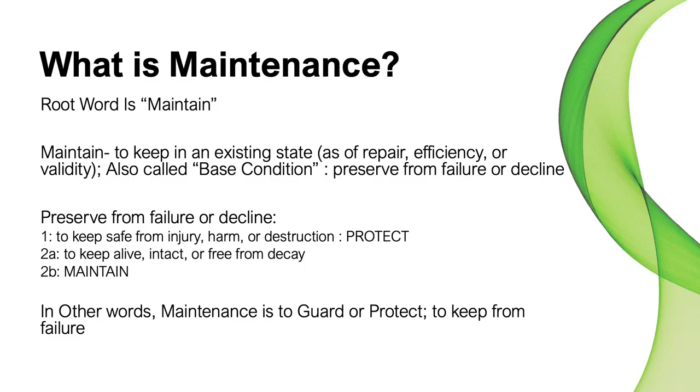What maintenance is not is firefighting. That's not the act of maintenance, that's the act of correction.

You're gonna love tomorrow's keynote, by the way.

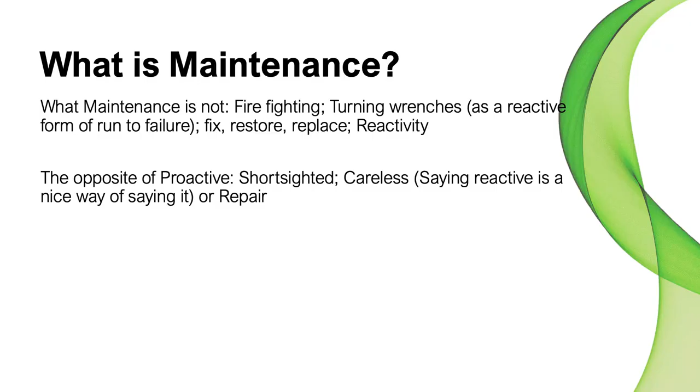From a terminology perspective, we've got all kinds of fun stuff we're gonna talk about today. This is the exciting stuff about maintenance. We're gonna talk about potential failures and failure modes and functions and failure modes and effects, and all kinds of boring crap that gets us down to what do we do to an asset.

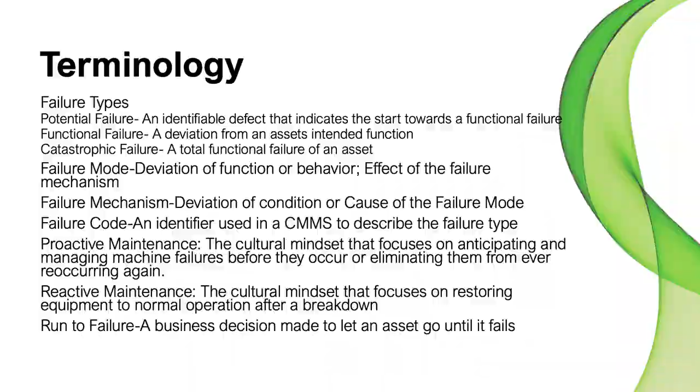Typically what happens is engineering drops assets off in your plant. Hopefully they even give you a manual with it. That's a maybe. And then someone transcribes the owner's manual into EAM, and that becomes the strategy for the asset. This is a common scenario. Unfortunately, it's a horrible way to derive a maintenance strategy.

How many folks, did anybody drive here today? Is anybody driving? We have a couple people that drove. Okay, did you walk around your vehicle this morning? Did you check the left blinker? Nope. The right blinker? Did you check all the fluid levels? Well, the owner's manual tells you to do that each and every time before you drive the vehicle, so why didn't you do it?

I didn't read it. Well, it's impractical to do it every time you get in. Well, it either is the right strategy for the asset or it's not, right? And in your head, you did what's called a risk prioritization. You have determined it is unnecessary for me to check the left blinker because you have what's called detectability.

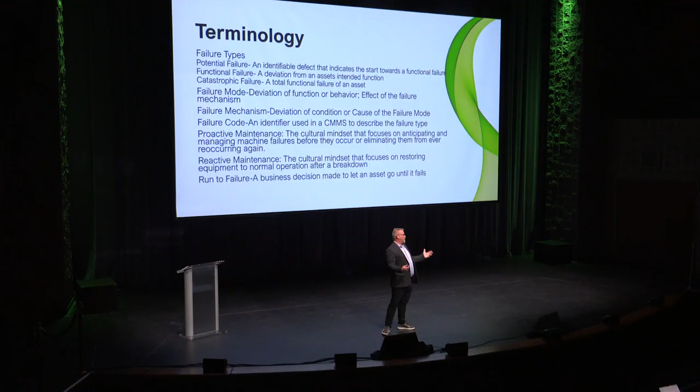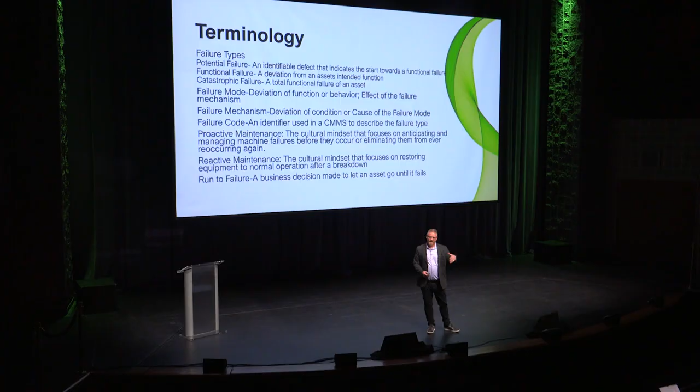Inside the cabin, if the left blinker is out, it will blink faster. So as an operator, you have detectability. You didn't check the tire pressure because now you have a dummy light inside the cabin that tells you your tire pressure's low. The design of the vehicle, the asset itself, has reduced its risk priority number for certain activities. And in your head, whether you knew it or not, you walked through the logic that exists inside EAM in the RCM section.

So we're going to walk through some of this terminology together and hopefully understand it a little better. I'm not going to read. You guys can, everybody can read? Great. I am far from a read-the-slides person, which is sometimes a downfall.

Well, let's look a little bit about some of this failure mode and failure types. 3 types of failures to be familiar with. The potential failure. A potential failure means a component on the asset is going to fail, but it has not catastrophically done so yet.

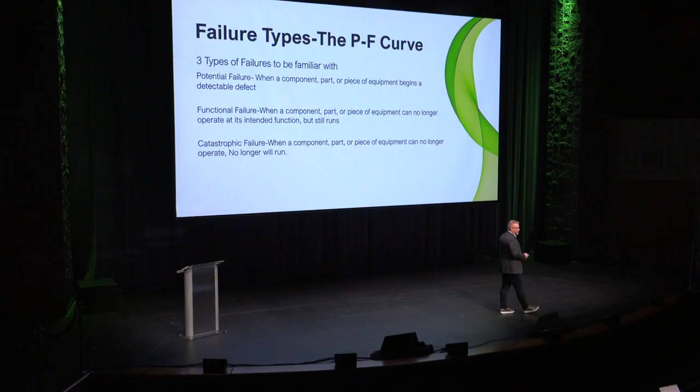If I get some water inside my bearings, because I'm in a food manufacturing plant and we pressure wash the bearings every night, and we aim specifically to get the water into the bearing, we have a potential failure. We then have actual functional failure. This is when the component can no longer perform its intended function.

And this can be catastrophic or not catastrophic. If I have a pump where the impeller wears to a significant enough place that I can no longer pump the specific GPM at the right pressure, then I have a functional failure even though the pump has not died.

You then have a catastrophic event. This is when the bearing blows apart, the shaft gets scored, the pillow block gets a nice oval in it, and we're replacing a bunch of parts.

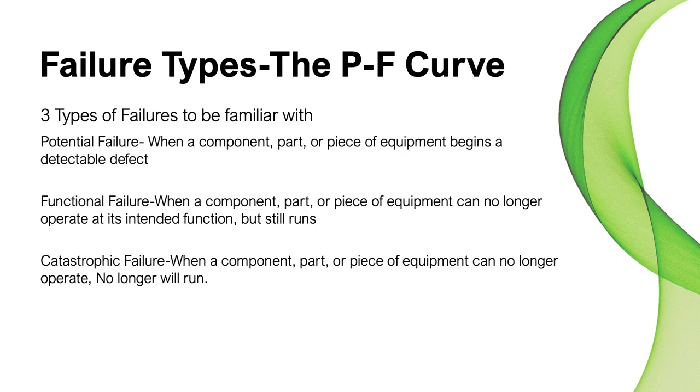The strategy from a maintenance perspective is to avoid the catastrophic event and hopefully avoid what causes the potential failures. Doug Plucknette's PF curve is one of the best ways to see this. This PF interval, or time it takes from the potential failure until the catastrophic event, is what we're trying to manage as a maintenance organization.

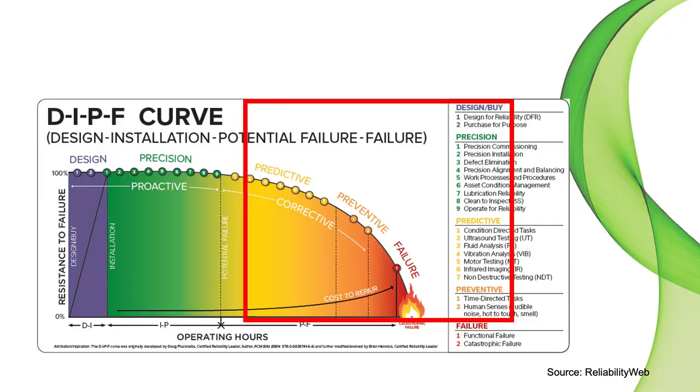Can we stop a bearing from ever failing? No, it will fail. What we can do as a maintenance organization is give it the longest life possible, and know far enough in advance to have a minimal impact to the operation.

Will the impact be zero? No, we're going to have some time that we have to replace the bearing. But we want to have the minimal impact to the operation. When is it most convenient for us to swap it out?

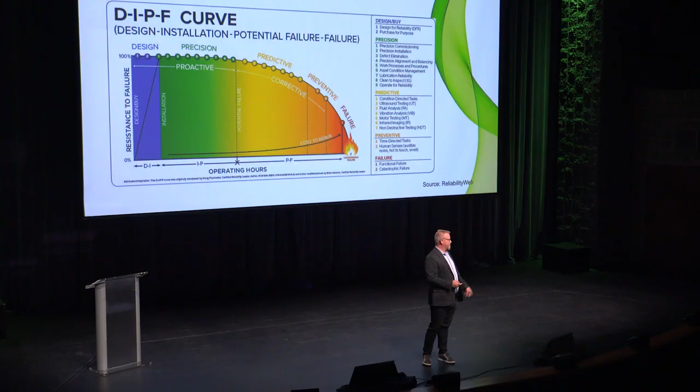So how does equipment fail? Because it's physically unable to do what it's supposed to do, or because in some cases we cause it. Sometimes it's a human intervention that causes a failure.

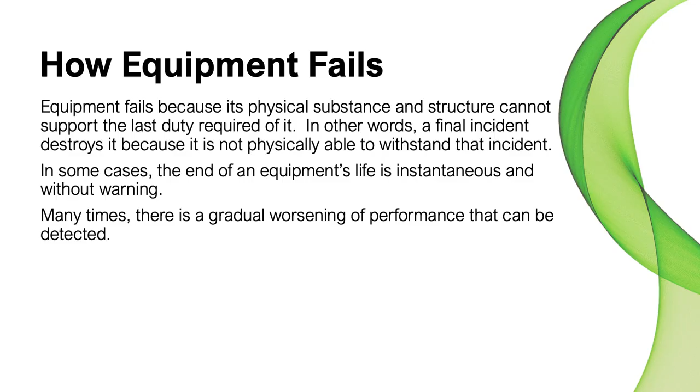And so when we develop a maintenance strategy, we are trying to do the minimal amount of intrusive maintenance. This is why we use things like predictive technologies, ultrasound, vibration analysis, and infrared thermography. Those technologies do not stop a failure from occurring. What they do is buy you time to appropriately plan the work when it is least impactful to the organization.

Oftentimes, this degradation can be trended over time, and we can have a rough idea of that PF interval—how long will it take to become catastrophic, relatively speaking. Knowing that time window allows you to determine frequency of execution of tasks.

So we can derive or guess what the frequency is, whether it is meter-based or time-based, both handled well within EAM. But that interval is based on what's the point from potential failure until a catastrophic event. Obviously, we need to inspect or take task interventions in a shorter frequency than that interval. If it's longer, then we could miss the incident.

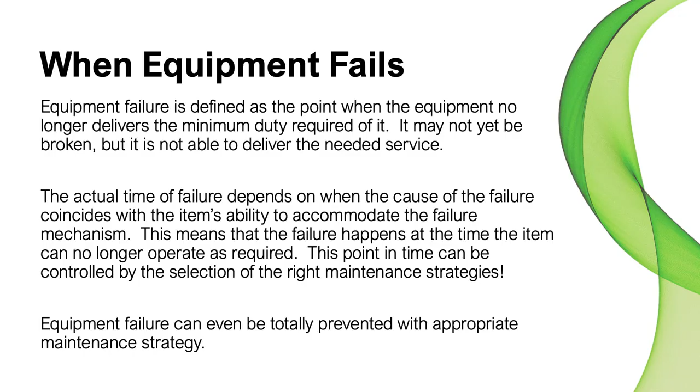So the actual time of failure depends on when the cause and coincidence of the failure happens. This point in time is when we can no longer operate the asset effectively. And our maintenance strategy is designed to prevent that issue. So how do we get to that point? Let's explain it very clearly.

On the left-hand side is infant mortality. This is when a component does not burn in. It doesn't even last its warranty period. This is electronic components that weren't bench tested, things that weren't installed properly, things that were manufactured the day after the Super Bowl, all that stuff.

On the far right, we have age-related wear out. This is stuff that was built right around World War II. Otherwise, this is a unicorn.

Everything in between is known as the random event pattern. The reason it's random is because if I take 2 pumps, identical, install them next to each other and run them the exact number of hours, they will not fail at the same moment for the same failure mode. That makes failure modes, generally speaking, random events.

When an asset is designed, it has a base condition baked into it, a designed-in reliability. I can buy a Toyota Corolla or a Ford F-150. They have a completely different expectation of reliability and cost to operate and maintain, and it is baked into their design. You do not get to choose it later.

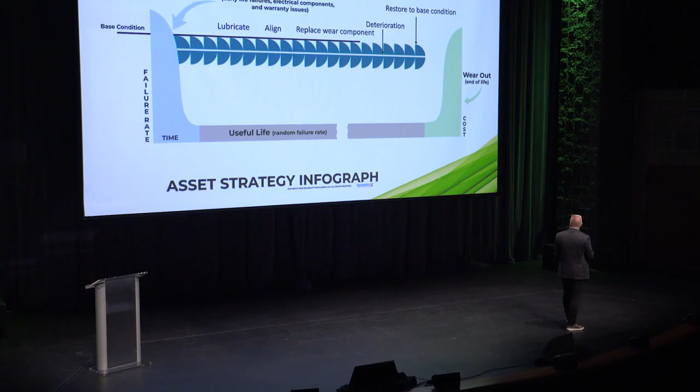Because of this, we derive a maintenance strategy. Let's say we use the OEM recommendations. Every morning we check the lights and restore back to base condition if we find an issue. This happens in your plant every day - this is your maintenance strategy. An asset deteriorates, maintenance shows up, replaces a belt, restores it back to base condition. Asset deteriorates, maintenance shows up and lubricates it, restores it back to base condition.

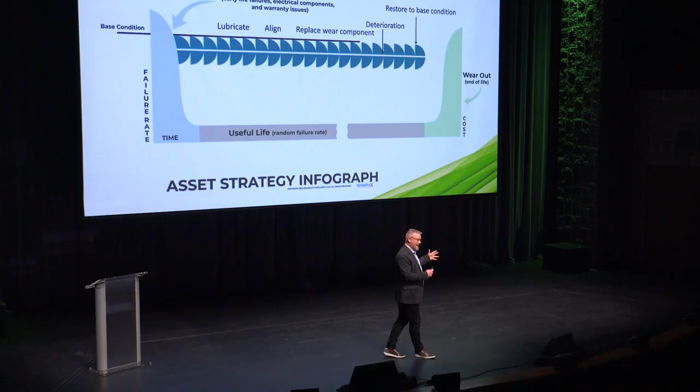This is the role of guard and protect. There are certain components on your assets that are called wear components. They are designed to wear, to protect the asset. Maintenance's role is to manage those wear components.

The inverse of this is the cost of the asset. As an asset deteriorates and friction builds up in a bearing, I have to use more energy to turn the motor. When I restore back to base condition, I also restore back to base operating cost.

Now, we utilize techniques such as design for reliability to change where that base condition sits. For example, we can use motor bases that are two pieces of all thread and it takes forever to get them aligned, or we can buy motor bases with two sets of rails and a single adjusting bolt. They have a different cost to the maintenance organization based on how long it takes to maintain that asset.

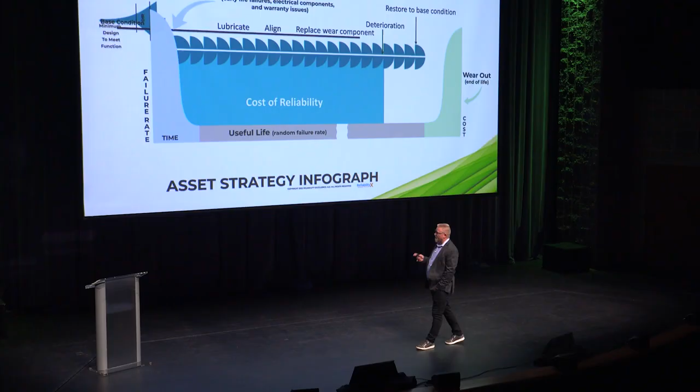We can buy cheap motors or we can buy good company motors, just like we can buy the Toyota Corolla versus the F-150. We utilize techniques like reliability-centered maintenance, or FMEAs, or the functionality inside EAM around RCM, to alter this pattern.

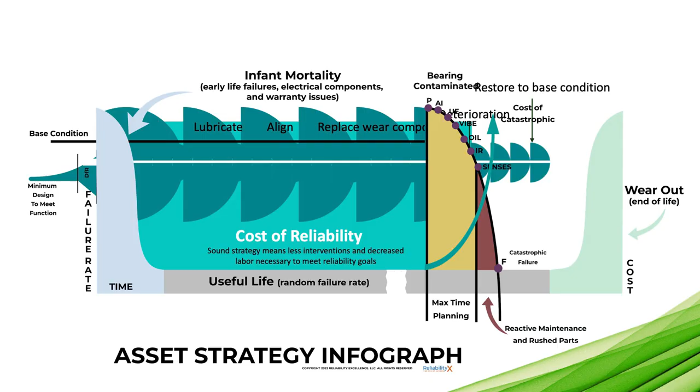How does this happen? Great question. This happens because I'm no longer doing tasks I should not be doing, and my frequencies are based on the actual failure mode. What does that mean? Great question.

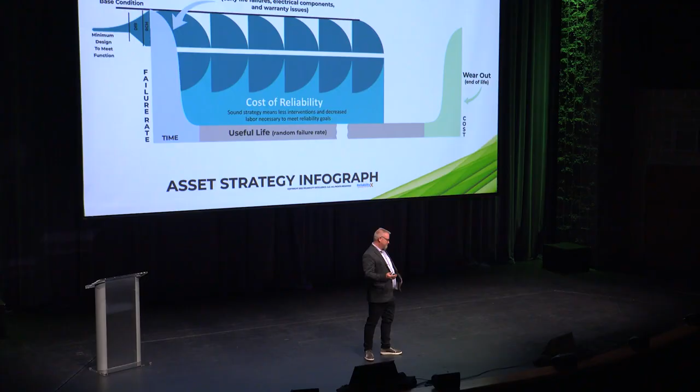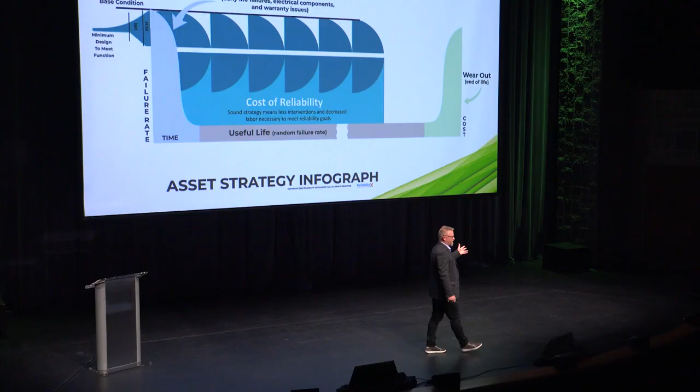Let's say it's an air handler. How many folks have air handlers in your plant, right? It's a simple asset, we'll use simple stuff that everybody has. The PM frequency today is probably driven by the lubrication requirement, so you have a quarterly PM. And somehow, while I'm there, I'm checking damper linkages that fail once every 10 years, and I'm inspecting things that don't fail, that I have no history of a failure of. But because I'm there, I'm doing a bunch of other stuff.

The logic you'll go through when evaluating risk priority number will get rid of things you should not do and give you a more appropriate strategy, thus changing the deterioration rate because there's less human intervention, and changing the overall cost to operate and maintain the asset.

Now, eventually, I'm still going to have this potential failure, this point in failure time, where I contaminate the bearing. I get a speck of dirt, somebody doesn't clean off a grease gun, something. We utilize those predictive technologies to assess for these conditions.

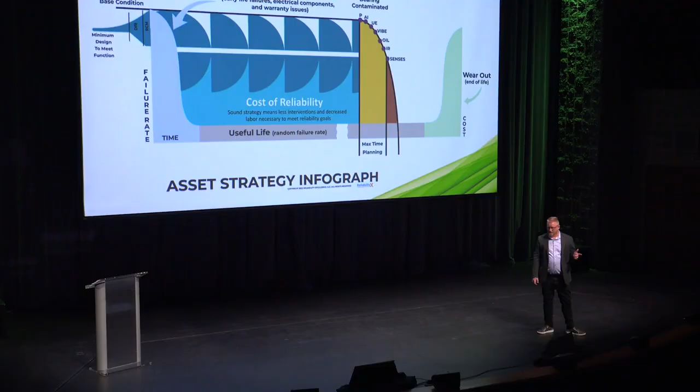Whether it's machine learning, AI, or infrared thermography, vibration, and all those other technologies, we are assessing condition long before your senses can sense it.

The reason we do that is for maximum planning time. Should we use our senses, we're more likely to have the catastrophic event. And when we use our senses, we're often rush ordering parts.

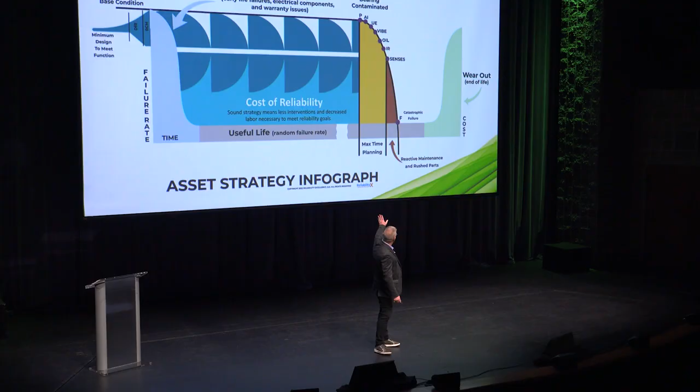So I can utilize what EAM has built in, utilize the predictive technologies, utilize the machine learning capabilities, and know in a large enough window to appropriately plan the activity, or I can let nature take its course.

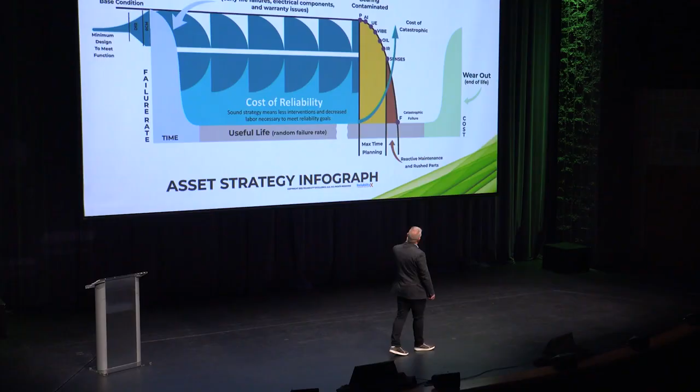It is, but it's also why your costs are high. Because not only am I replacing the bearing, but I scored the shaft and I have to replace the shaft, I have to replace the pillow block, maybe I damaged the fan. So the idea of we can't afford to do that, but we can keep affording to rush order parts and replace five things instead of one is nonsense.

So how does this work? Luckily, there's a standard and I don't have to reinvent the wheel here. SAE JA1011 is the standard for RCM. There's also JA1012, which is the application of it. And basically what it's going to do is ask a series of questions.

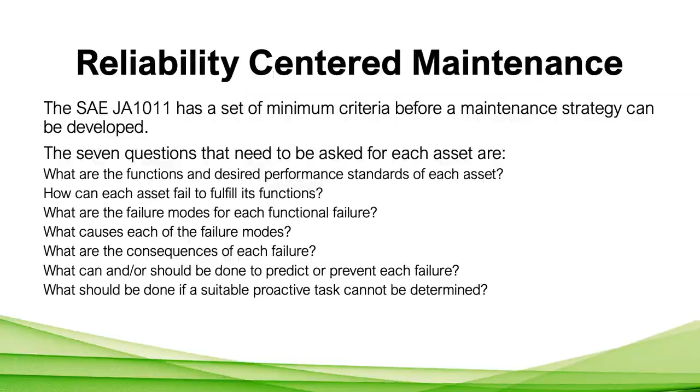What are the functions of an asset? As an example, the functions of a pump are to displace a medium at a specific GPM and pressure. The secondary function of a pump is to not leak unless it has a packing gland, and then it's leak at a specific drip rate. So I've got two major functions.

That is, well, how can an asset fail to perform those functions? I can have a motor failure, I can have impeller wear, I can have all kinds of things. What are the failure modes associated with that?

Causes, consequence to a failure. We'll talk a little bit about some of those. We're not going to get into a lot of detail because I only have an hour. And then what can we do to either predict or eliminate the failure mode from happening? And if we can't do that, what other intervention can we do?

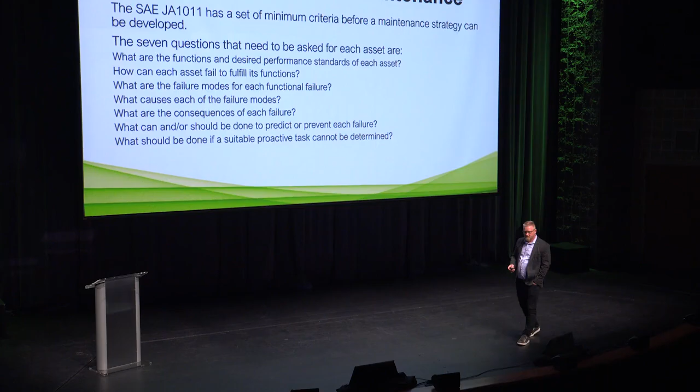So let's look at how it's structured. Whether it's an FMEA or an RCM, it's pretty much the same thing, just to a slightly different detail level. We've got functions, functional failures, failure modes, effects, consequences. And then we derive this risk priority number. We'll talk about that in just a second. And the entire goal is to reduce that risk priority number.

That's all baked into EAM. How many folks are using that functionality inside EAM today? Outstanding.

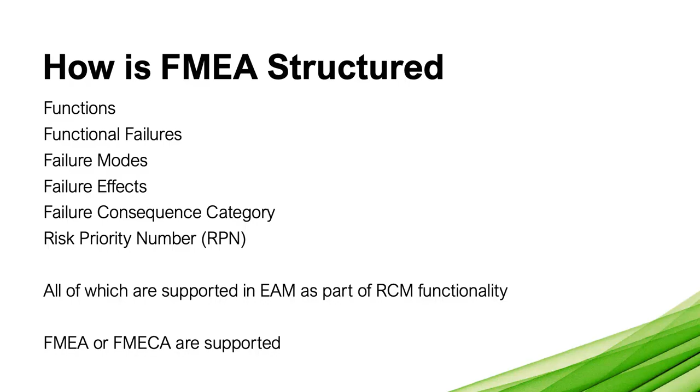This all starts with first understanding what is an asset. This is often where folks struggle. What does or does not go in the system? What constitutes an asset record? That should be well defined inside the organization. Otherwise, we end up with a bunch of stuff you'll never write a work order to.

Or the other way around, finance dictates it, and the only thing you have is everything you spent more than $5,000 on. So we have to define what an asset is.

For me, there's some general questions to ask. I know it's a little bit of an eye chart, but do I replace parts on it, or do I throw it out and replace the whole thing? That's first and foremost. If I throw it out, it's not an asset, it's a spare part.

The second question I ask is, is it a major component located someplace else? So if I have a split air system, I want to know that there's a coil outside somewhere on the roof, just because the location's different.

Next question is, am I required to track its calibration? Calibrated instruments, you don't usually replace parts on those things, but if you're governed by some regulatory agency that requires you to track the calibrations, then they're assets too.

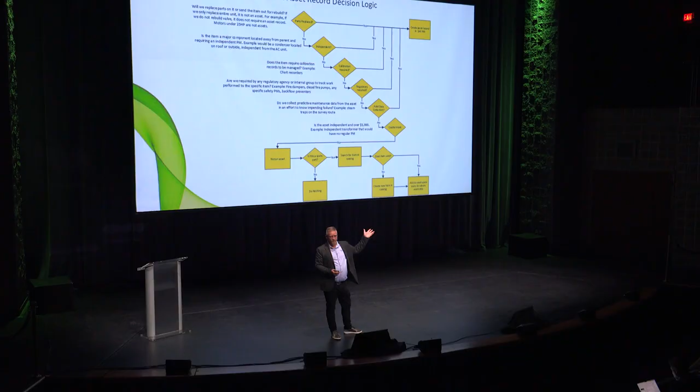And then if all those are no's, guess what? It's a spare part. Now, this is just a general rule of thumb. This is a starting point, right? So you make changes to this based on your organization and what your organization wants to track, but we developed this just to be a starting point.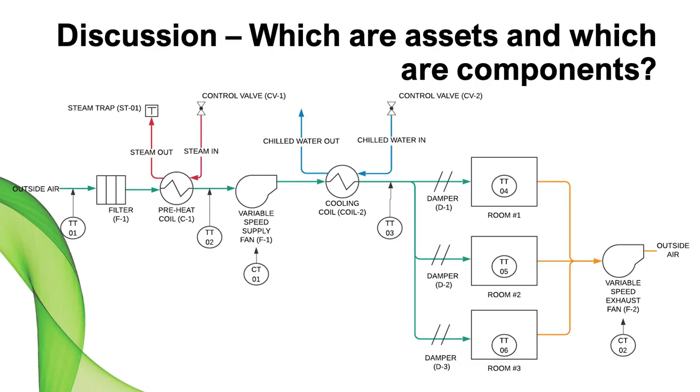In scenarios like this, I would say the VFD, if you replace the boards and it has filters that need to be PM'd, then the VFD is an asset. If this is in a clean suite and you have to calibrate the temperature signals, then that's an asset too. But if not, they're not an asset.

I may replace the coil, but I don't need that to be—that's not an asset. When it's dead, I throw it out and put a new one in. I'm not replacing parts on it. So having a good definition helps us to move along where we need to be.

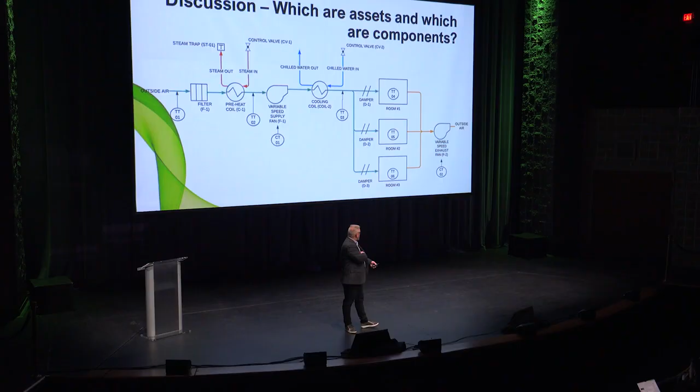So the next step is to understand criticality of the parts, of all those assets we put in. And right, baked into EAM is the ability to not only give a score, but to build the questions that will derive the score. How many folks have their criticality analysis built into EAM as a series of questions? Outstanding.

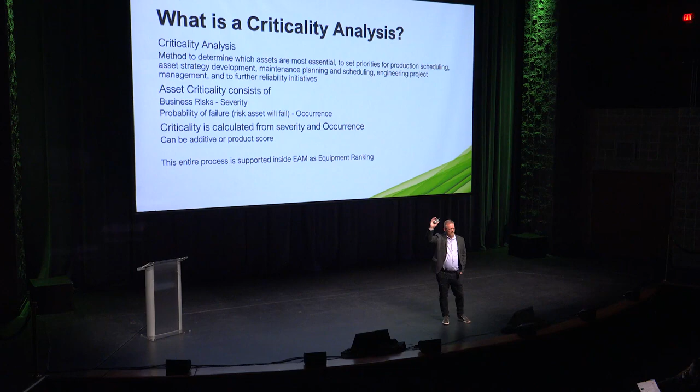We have to understand severity and business risk, and that's different for everybody. So the reason EAM allows you to build it is because that's different for every organization. You can't stand up here on the stage and say, well, it's severe if it costs more than $1 million in a failure. Well, that's great if you're a gigantic company, but things are critical at 10 grand at some companies.

Other severity categorizations that exist: environmental, quality, safety. You can even have other things sitting in there for occurrence. How often is it likely to occur? What's its operating context? Do I need it 24/7, 365? Does it have redundancy? Is it an N+1 scenario? All of those things help derive the critical nature of the asset.

Why do we need to know whether or not the asset is critical when building out a maintenance strategy? Because one of the components to determine should I reduce the risk priority number using some technology or not is the cost to do it. Just because I can do something doesn't mean I should. If it's a non-critical asset, my PM strategy should be run to failure, put some spare parts in the storeroom. It should not be go collect a bunch of predictive data that costs a lot.

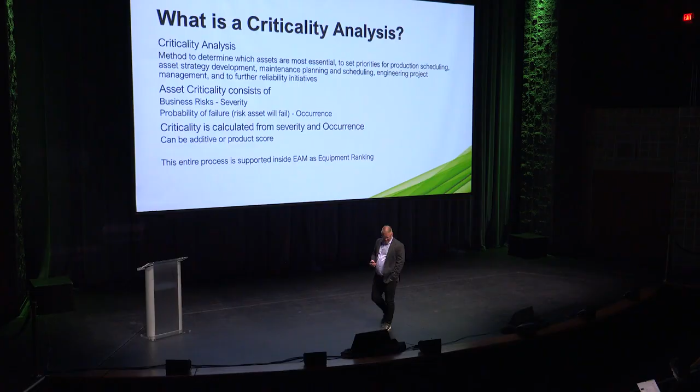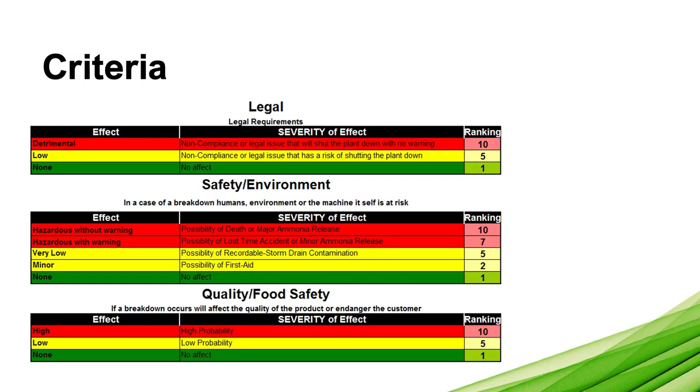And so we calculate risk with severity and occurrence. These are just example criteria that sit in a deck because if you download the deck, you'll have them. We're not going to read through this. Your organization will have to develop their own criteria and scoring mechanism. That matrix can be built directly into EAM, which is fantastic functionality because most systems just say, well, tell me what you did in some Excel file someplace.

Let's go through this really quick. Functions of an asset. If we have an air handler, it is designed to move a specific amount of volume and may have to do so at a certain temperature and a certain humidity level. Lots and lots of functions exist. The first step is to understand all the functions of the asset. Inside EAM, this gets built on the equipment template record when using the RCM logic.

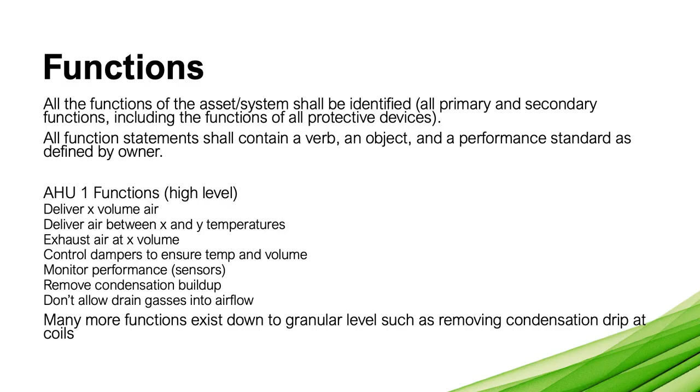We then have functional failures, which basically just means it doesn't do the functions. We then move on to failure modes. How are we going to not move air? Well, we can have lots of reasons we don't move the air. The motor could fail. I could have a belt failure. I can have a closed damper. I could have clogged filters. Many, many reasons why I'm not moving the appropriate amount of air. They're all failure modes.

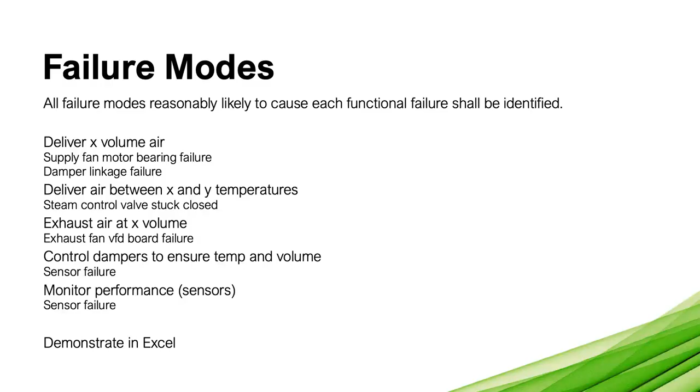The failure effects describe what would happen if no task is done. If I don't do anything, what is the effect of I'm not moving enough air? It could be I have to close down the theater. If I'm not moving air, we're not allowed to use the space. It could be I have product that's stored in here that needs to be at a certain temperature and I lose the product.

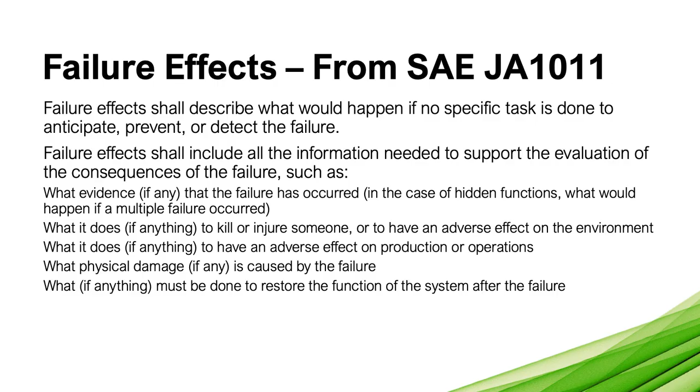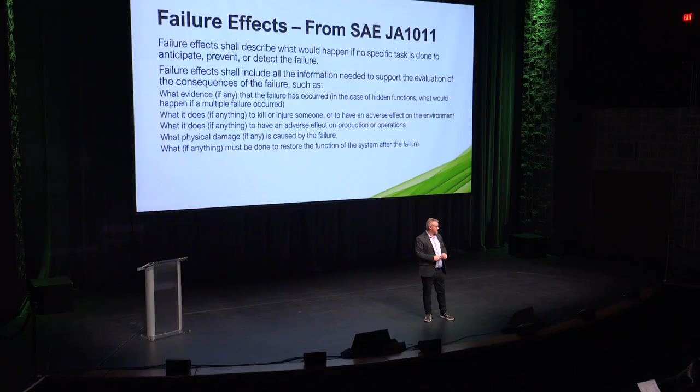Why do we need to know the effects? Well, we're about to put together a maintenance strategy to mitigate this effect. We need to know what its cost is. What would it cost if we have to evacuate the theater? What would it cost if the product in the room went bad? The consequence side of things is more on the safety side. So from a consequence perspective, this deals with safety or environmental. And so we list those out separately.

We then have to get down to a risk priority number. That risk priority number is based on 3 categories. The first being severity. What's the severity of this failure mode? And that varies. It's not asset-based, it's component-based. For example, what's the severity difference between my left blinker is out and my brakes don't work? It's the same asset, it's a car. Completely different severities for different failure modes. If I have a pump, the motor failure has a different severity than impeller wear. If the impeller wears, the VFD ramps up and I can still move product. If the motor fails, I'm not moving anything. Different severities.

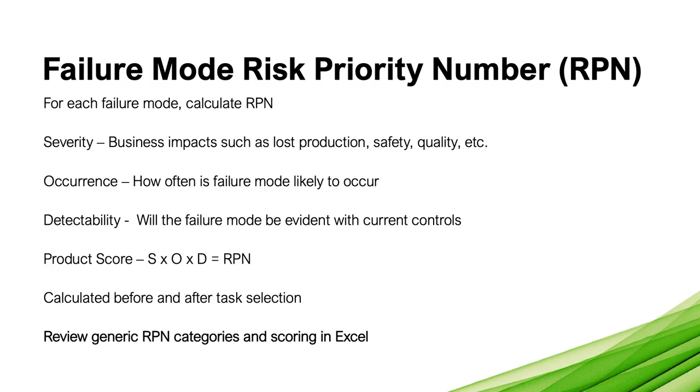The second category is called occurrence. And occurrence looks at how often did this occur? If you have data in the EAM, you use the actual data. If not, you have to take an educated guess. The third entity here is detectability. Will an operator know it immediately? Some failure modes are hidden, and so their detectability is extremely high, meaning, well, it's an inverse score for detectability. A high score means you have no detectability.

Emergency lights, they're all over the place. They're a hidden failure mode. That means you're not testing to see if they work—you're actually testing to see if they have already failed. There's no way to know it will work when you need it. It's not possible.

And so you're testing e-stops, same thing. You're testing to see if they have already failed, not that they work. You may have caused it to fail by running the test, and the next time someone hits it, it's not going to work.

That makes it a hidden failure mode. So detectability is about whether or not the operator is going to know. Now inside my vehicle, I know my tire pressure. The automotive industry has made my detectability score lower and lowered my risk priority number, so now I don't have to check my tire pressures.

This is calculated typically as a product score, and you end up with a risk priority number. The goal of building a maintenance strategy is to reduce the risk priority number. It's that simple—failure modes that have a high risk priority number, you attempt to lower it.

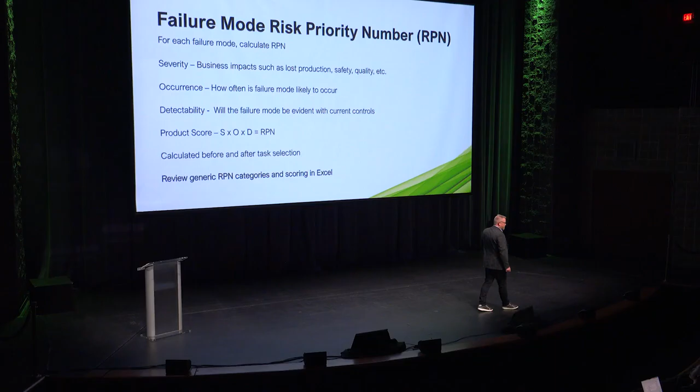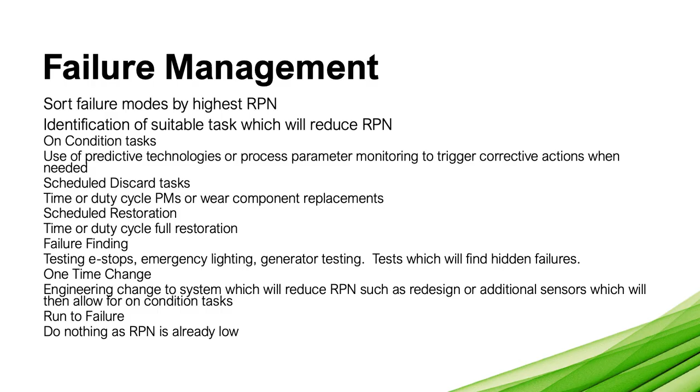So we sort those failure modes by the highest RPN number and decide where the line in the sand is. This is always a point of contention for people that execute this. There's no defined line in the sand—you have to use common sense. When you start getting down to failure modes you know you should not be addressing, that's the line in the sand. Don't do anything below it.

So we've got a couple of different ways to mitigate a failure mode. The first way that we should attempt to eliminate a failure mode is to engineer it out. This is called a one-time change. It's an unscheduled activity, meaning it doesn't happen at some frequency—you're going to do it once. You can engineer out the failure mode so it doesn't happen anymore.

If you are unable to engineer it out, the first scheduled approach is to assess its condition. Assessing condition can happen two ways, through technology or physically. You assess the condition of the asset.

If we can't do that, then we have potentially a scheduled discard. A scheduled discard is appropriate to things that have a consistent failure pattern. My belts usually last 2 years—if that's the case and you know that emphatically, then you can just schedule a PM every 2 years to throw the belts out and put new ones in. If you do not have a consistent failure pattern, then you need an inspection to inspect the belts and an on-condition task to replace them.

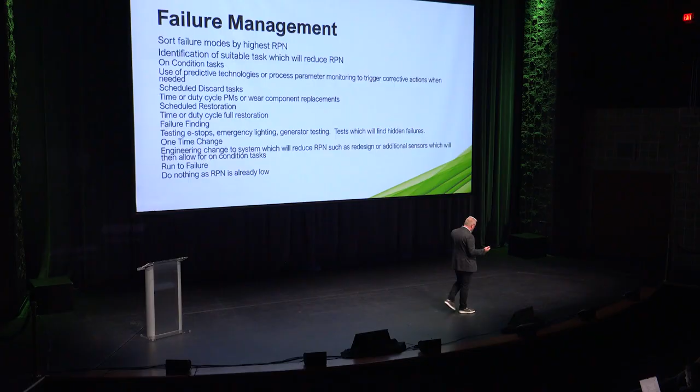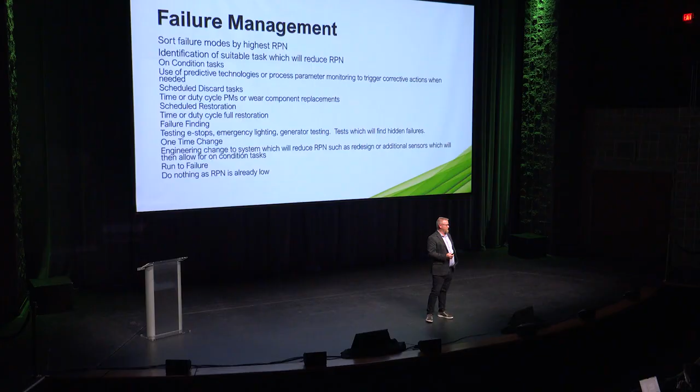Failure finding tasks, again, are check the e-stops, emergency transfer switches, generators—they're all failure finding tasks. A scheduled restoration is if I'm going to strip a piece of equipment down and rebuild it at a certain interval. This is often popular, but not based on it being derived by RCM logic. Companies will do annual shutdowns, ripping all of their equipment down to nothing and rebuilding it, and then they have 3 weeks of ramp up because they can't figure out how to get it back together right.

And then, of course, you have run to failure. Run to failure is an adequate strategy. Sometimes it's not worth doing the maintenance work. That's really contextual—it's based on what the asset is doing and the value proposition of the asset for your organization.

When I lived in Philadelphia, Philadelphia has an awful lot of radiant heat hot water systems for houses. So we've got a little B&G 100 or a little Taco, a little square pump that circulates hot water through the radiators. That thing's critical in the winter. But that same pump in your plant is run to failure. It's the same pump—the critical nature of it is what is it doing for the organization.

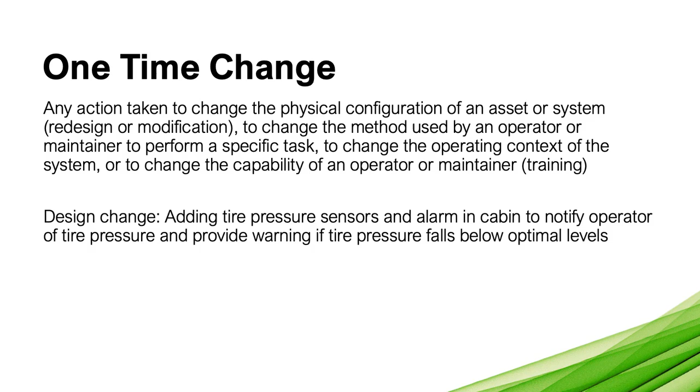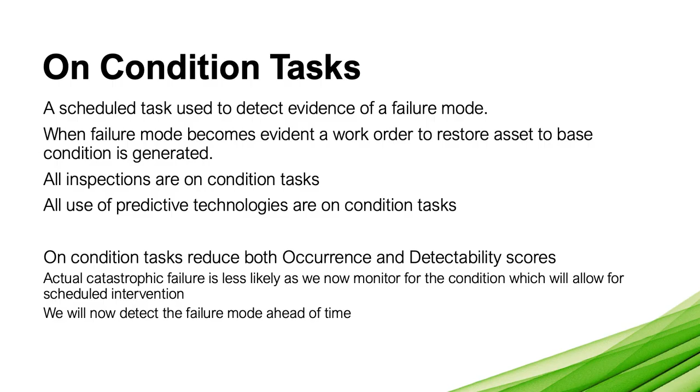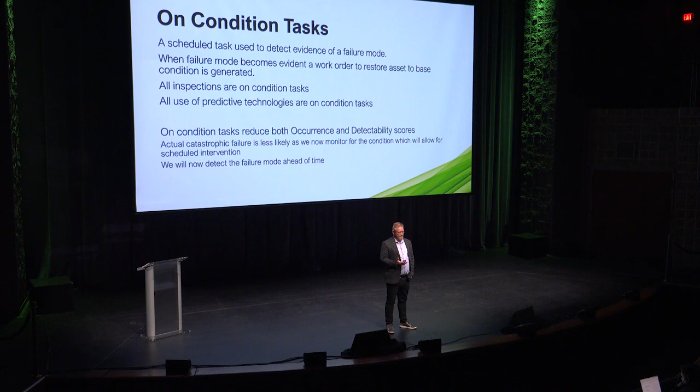So again, one-time change is engineering modification. On-condition task—I hate the terminology here. It's the terminology from the standard, but in my opinion, you are assessing condition; this is not an on-condition task. The on-condition task is when I find the bad condition and do a replacement. Once I have inspected it, either through technology or physically, and assess its condition to be bad, and I replace it, that's an on-condition task. Based on the condition, I replaced it.

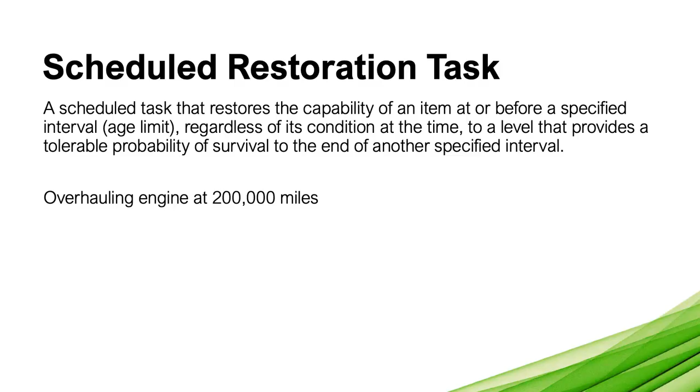Scheduled discard is replacing filters, your oil change—you're doing a scheduled discard when you do your oil change at a specific number of miles. Scheduled restoration is a complete overhaul. Failure finding task is for hidden failure modes.

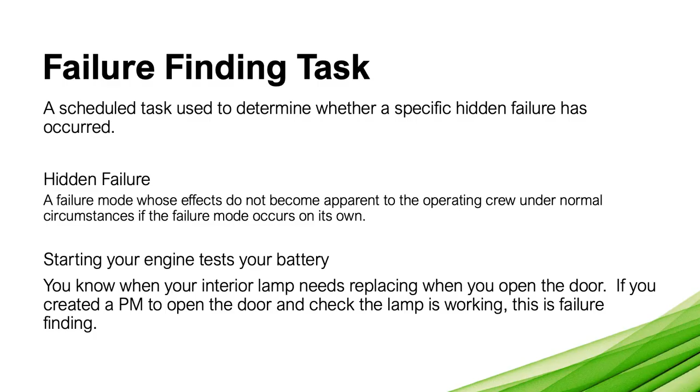All of these factors sit inside EAM, except run to failure. Although you can identify it as run to failure, you're just not going to create a strategy around it. There's no mitigate—the mitigation strategy essentially is don't do anything. The end goal is to reduce the risk priority number. If I have a motor that can fail because of lack of lubrication, using precision maintenance techniques reduces the risk priority number.

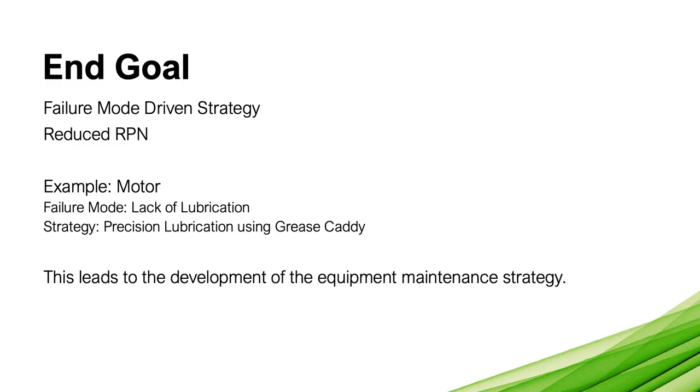At the end of all that, I've got a bunch of different failure modes I have to address, but sometimes at different intervals. Some of them are going to be cycle and meter based, and some of them are going to be time based. Some we're just going to put on the route for predictive maintenance, or on the lubrication route. So no longer will you have just one PM that comes out every quarter.

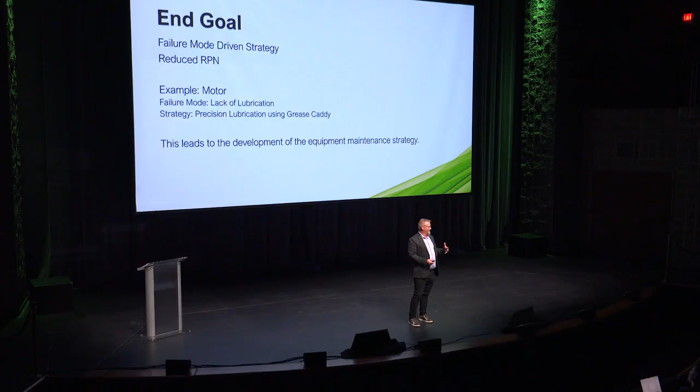We're all struggling to find resources. One of the ways you can get free resources back is to not do things you shouldn't be doing. So we sit down and do our scheduled tasks and our on-condition tasks, and we do a cost-benefit analysis. Should I do the task or not? Is it worth doing the task? One of the good reasons to do this is it gives you an argument for zero-based budgeting.

How many folks had to reduce their maintenance budget this year? Nobody? Wow, that's amazing.

That's usually a standard, or you just get the same budget. But it's based on somebody's arbitrary belief of what your budget should be. And then they say, well, can't you cut it 5%? Cut it 5%, based on what logic? This puts the logic behind what it will cost to maintain this equipment.

It's through a recognized engineering standard. I know it's hard to push back on your leadership team, but they have no qualification to determine what you should spend on maintenance. None. They're unqualified to tell you your budget.

You'll learn this tomorrow, but the asset just doesn't care. It doesn't care what you want to spend.